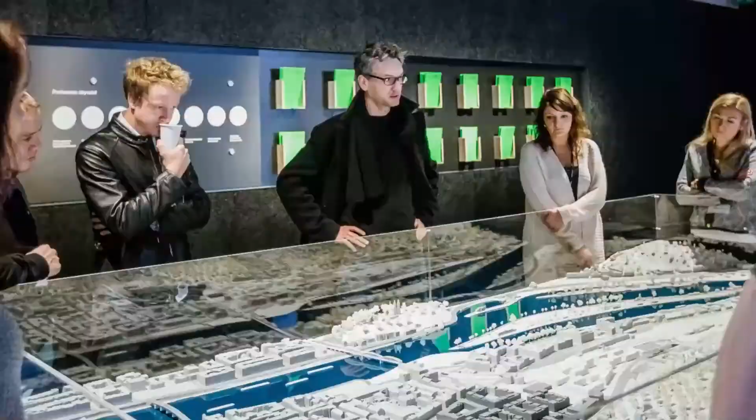Urban Talks is a series focused on abroad architects, abroad studios, abroad professionals. We talk about their work, about their philosophy, about their experience. Today, we have a special guest from South Tyrol, Studio NOA, which stands for Network of Architecture. It's based in Bolzano and also in Berlin, and it's founded by Stefan Rier and Lukas Rungger. Our speaker today is Andrea Dal Negro, architect partner of NOA and head of their Berlin office.

NOA is behind some extraordinary architecture, which can be found in incredible locations. You will see, we'll talk about mountain lakes and the top of the mountain summit. It will be beautiful. So today's host is Andrea Dal Negro, and welcome here in CAMP.

Before starting with our journey, I want to introduce shortly the office. So as you mentioned, Stefan Rier and Lukas Rungger are the two founders of this office in 2011 in Bolzano, so in Italy. And they both have experience in the touristic environment, so that's why they brought this know-how into hotel planning. And 3 years ago, we decided to open a second office here in Berlin to be a bit more international and connected with our German clients.

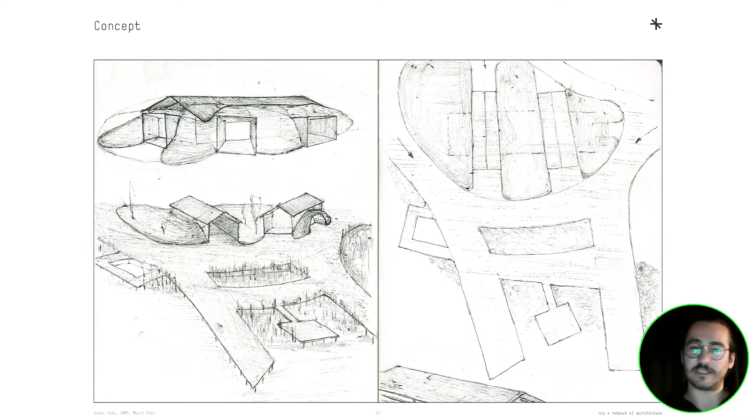So that's why our first approach was to play with the landscape in order to hide some part of the facade. Then we decided to split the volumes into smaller volumes, which intersect themselves along two axes. So there is one axis that faces the lake with the restaurant and the terrace, where the shape itself of the architecture is opening up toward the view on the lake.

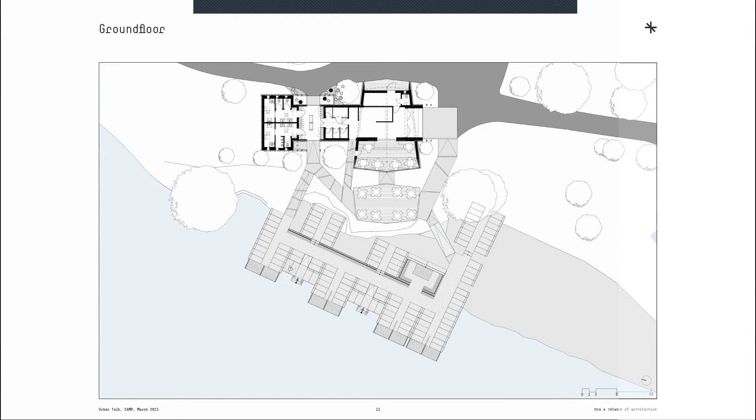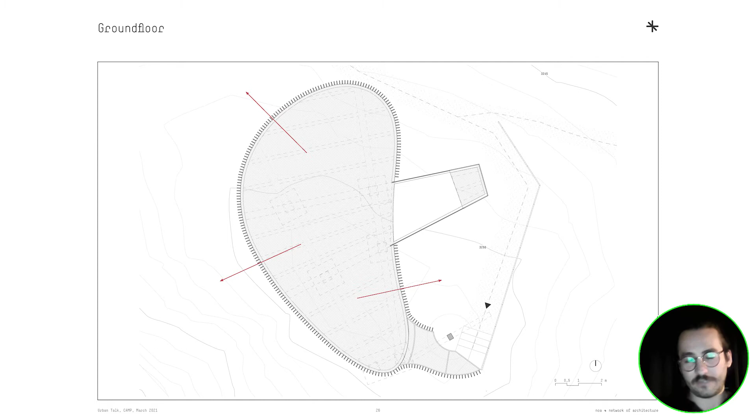While you have these curves, you can see through the platform. So the platform has also a panoramic bridge, let's say, or extra platform with the 3 glass sides.

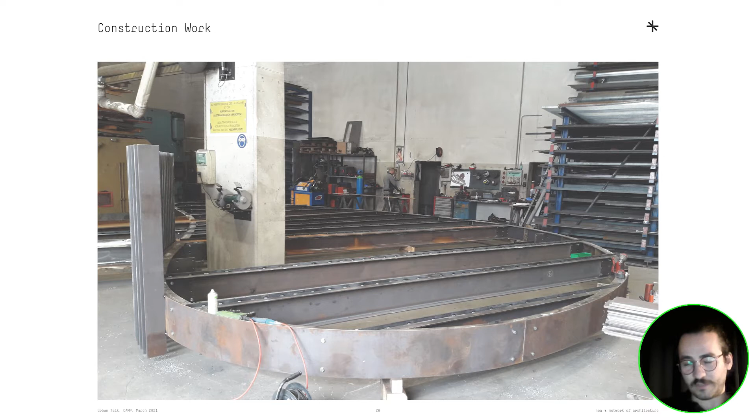And as the conditions are quite harsh during the winter time, we had a small window to build the platform. So we have done everything in prefab in steel construction that we eventually brought there by helicopters. So these are some of the pictures of the construction site.

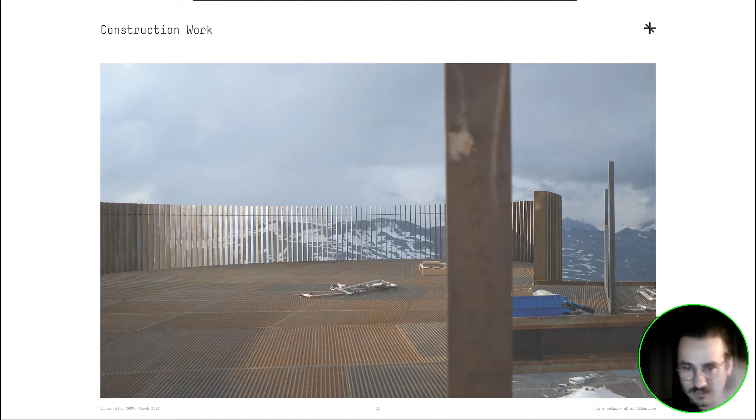So the main material is corten steel, because it's a material that is similar to the larch wood, is changing with the time. And that was connected to the fact that the glacier is something that every year changes its morphology due to the melting of snow and ice. And that's why we wanted some materials that could also somehow play and communicate with this changing in the time.

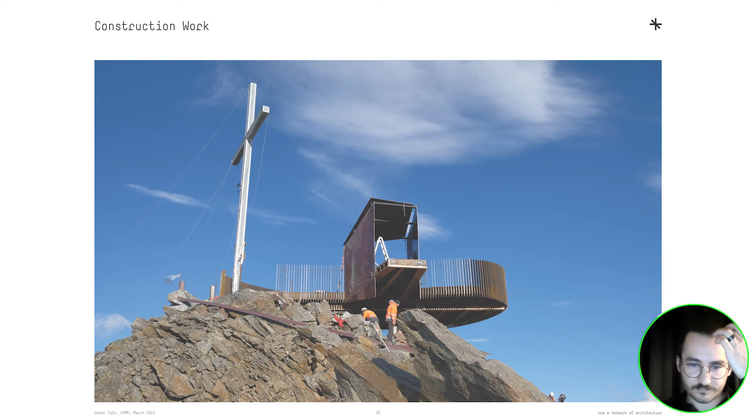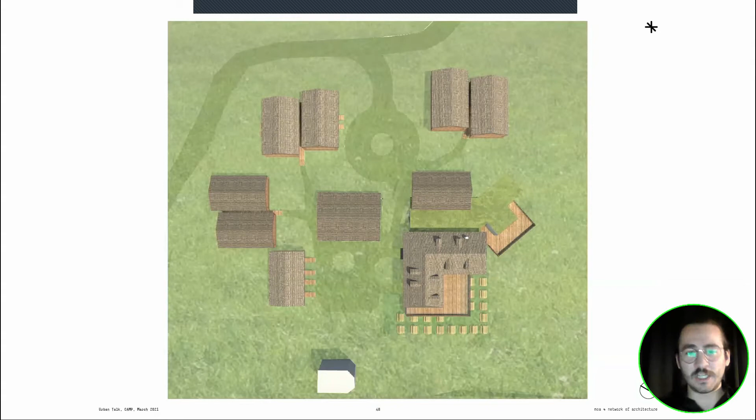This was the first sketch. So right now there is an existing restaurant with few rooms, and the client asked us to extend the restaurant, introduce 24 new rooms and a new small wellness area. So we decided to place the rooms all around. In the middle, we planned the wellness area, and then we extend the restaurant integrated in the landscape.

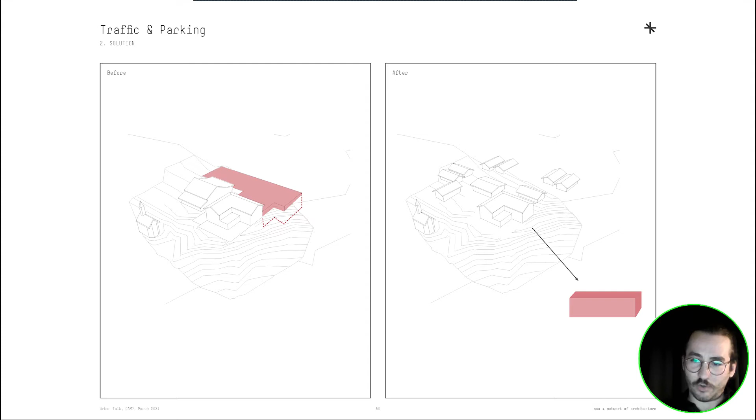But what is interesting about this project is that the first thing that came up in our consideration was the parking lots. So you arrive there, you have a beautiful landscape, but you see cars, and this was somehow not working with our approach, that was a more sustainable and environmentally friendly approach. So first of all, we decided to put all the cars in a garage, which of course is not a very environmentally friendly solution because you have to dig and put concrete. So we decided to take away the cars, bringing all the traffic down to the valley in order to free this whole area from the private traffic.

And together with the client, we saw some old pictures that before they used to reach this point with animals and the sledge. And nowadays you can reach the hotel with this truck. So you leave the car down in the valley, step on this truck, you go up to the ski slope, and your experience already starts down at the garage till you reach the hotel and the amazing views that you have from there. So together with the municipality and the neighbors, we decided to eliminate the private traffic from all of this area.

And we got a certification for a ClimaHotel, which is the certification that says that a hotel is environmentally friendly, because we use natural materials, natural insulation, and we try to minimize the pollution and the human impact in this context.

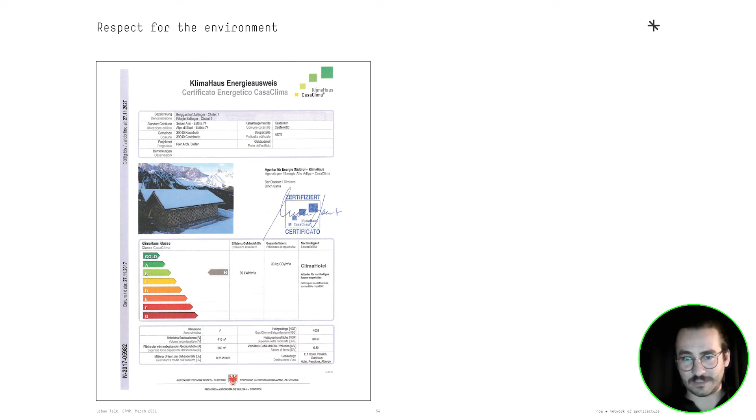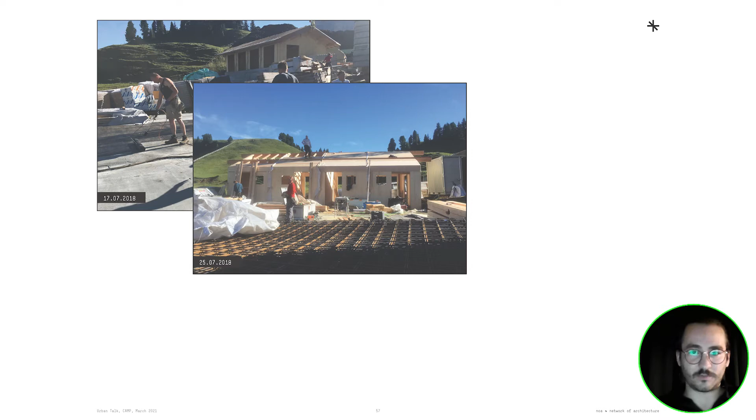So in July, we received the construction approval, and we did these buildings with a prefabricated system. As you can see, in the middle of July the foundations were there. Then in one week, walls and roofs were mounted. One month after, the windows were closing the volume. And six weeks after, the chalets were done. So it was quite a fast process.

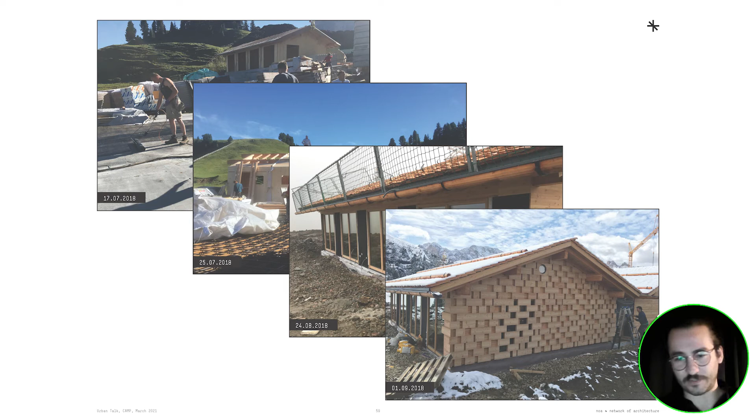Thanks to the prefabrication systems, we were able to bring all the materials there, put them together and finish the project. So this is the final result in a snowy wintertime. The chalets are covered with a larch wood facade, similar to the first project I showed you. We used this modular system for the facade so that the client can choose the grade of intimacy and privacy by opening and closing the facade of their own rooms.

So this is the extension of the existing situation. We also used wood and textile in the interiors in order to make them really cozy after you are done with the ski day. You can enter here and have a rest in a very warm and cozy environment. For the bar, we used a large piece of one tree that was found in the surroundings. And this is the small sauna, which is also integrated with the landscape.

The rooms are accessible through an open floor. On one side, we wanted to avoid heating dispersion, so we made all the rooms very compact. On the other side, we wanted the guests to have the feeling of stepping inside their own chalet. You are in this common floor, common connection, which is still outside, and then you enter your own room directly from the outside, as if it is your own house.

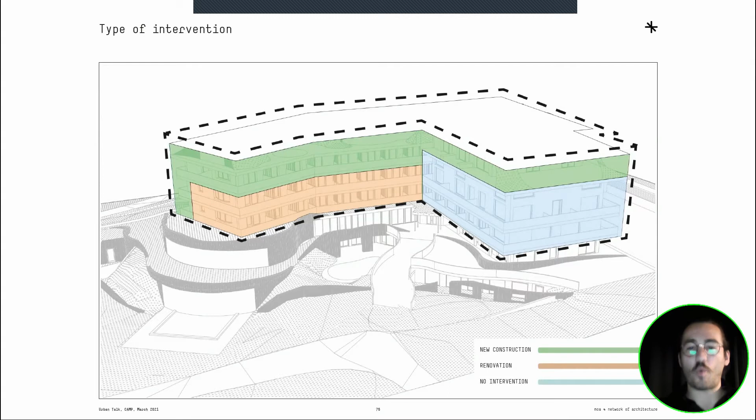So here was the first diagram with the three different types of intervention. Of course, it's quite complicated because you have to deal with different styles, but in the end we wanted to have one uniform object. So even if it's divided into these three different interventions, we wanted it to look like one single hotel, one single building.

The previous name of this hotel was not Selena. It was rebranded, but it was called Moorhof. The Moor is this part of land up here; you can see its morphology. Let's zoom in. We wanted to keep the story of the name of the hotel in the building itself. So at the beginning, we took out a pattern inspired by this Moor, and we decided to create a facade that could envelop these three different interventions in order to obtain one single effect.

So this was the final result. As you can see, there is this double skin, which has this texture related to the location, to the existing Moor. But at the same time, behind it, you see these three different types of interventions: the new construction, the existing construction, and the reconstruction, which are somehow hidden behind this facade.

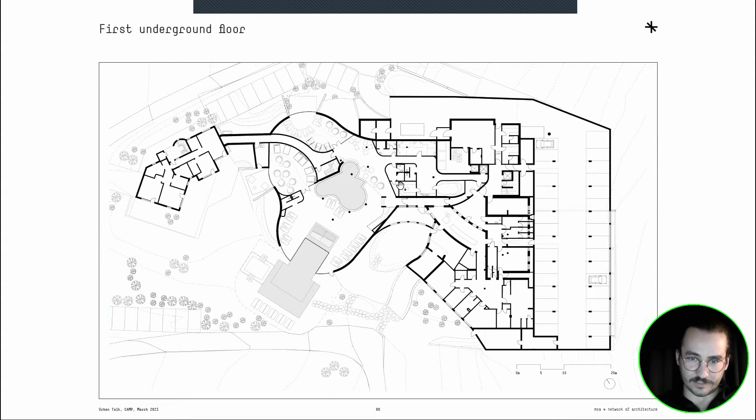Talking about the concept of moor, we are going shortly to the interiors. And this is the existing situation underground. So this central part is the wellness part. And on one side here underground, we placed the sauna. So the saunas are in this very dark place, and we wanted to recreate the feeling that you have when you are in the moor, so in a very dark and wet environment.

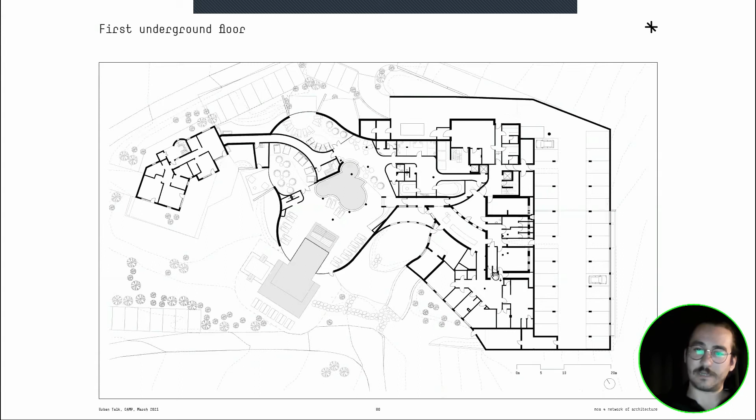But we wanted also that the client has this experience to start from a very dark and humid and wet environment. And while crossing it, here at the end, we placed a lift that goes up till the last floor. And then you can go out, walk on the roof, and access this panoramic sauna. So it's this feeling that you have from underground to overground through this lift.